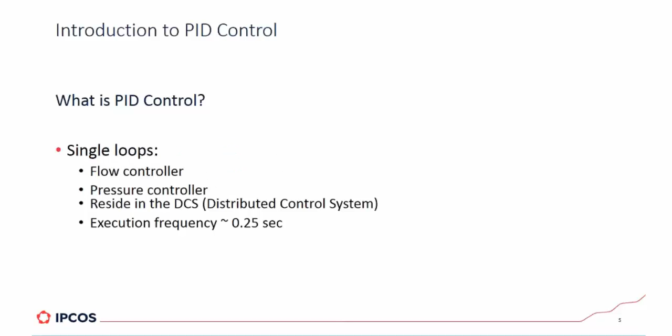So as I said, these controllers are single input, single output, so single loops are usually the type of control problems that are tackled by a PID controller, and those controllers are very good at that, provided that they are tuned properly.

So as I said, sometimes there are also more complicated structures in your DCS system, like cascade controls or ratio controls. Sometimes nonlinearities have to be dealt with using linearizations in combination with the PID controller. So the single loop controllers are the simplest ones, but there are more complicated ones as well.

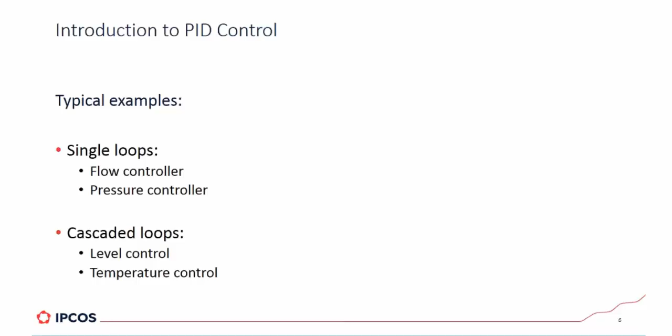The integral part is a summation of the error over time. So if there is an offset, if the error is constant, the integral keeps growing until it approaches the set point again, and then the value of the integral part will become smaller over time again.

The derivative part is related to the rate of change of the PV or the error, and that helps to anticipate changes in the future. And that's the reason the derivative part was added to the controller, so that the controller can benefit from predicting where the PV is going, because the initial slope shows you the direction the PV is moving in at the moment, and if that tendency stays the same, then it helps to already compensate for that change in slope.

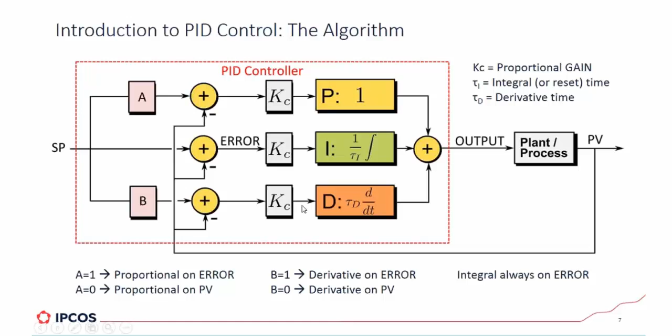So if you choose equation A in a Honeywell PID controller, that means that A and B are both 1. And that means that the proportional part and the derivative part of the PID controller work on the error. If on the other hand you would choose equation C, that would mean that A and B are both 0, and then both the proportional part and the derivative part only act on the PV, and the set point is not taken into account in those two parts. That means that if you change the set point, initially only the integral part of the controller will do something.

So it's important that you are aware of that, and it's important if you are going to tune a loop that you know what type of algorithm is used. It's also important that you think about the use of the algorithm that is active at that moment. Is it really fit for the purpose you have for that particular loop? And of course, if it does not fit the purpose, then it's better to change the equation.

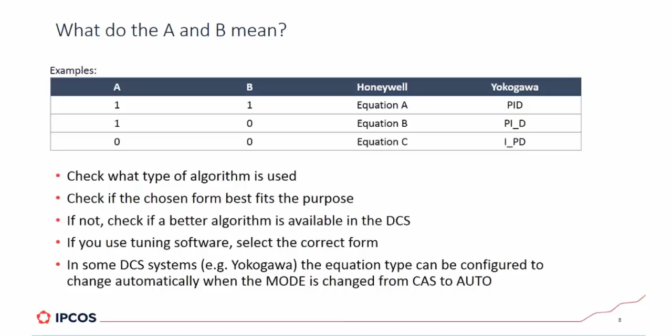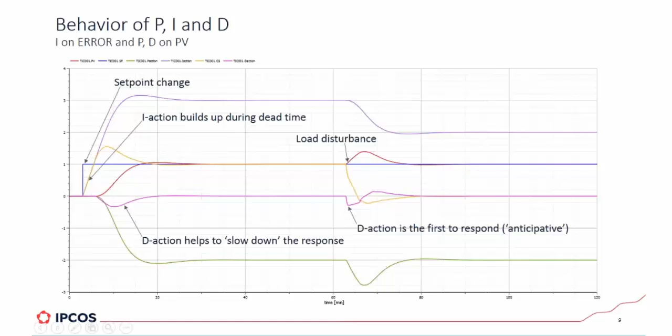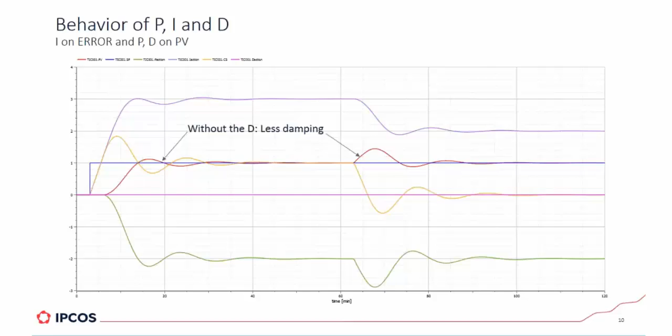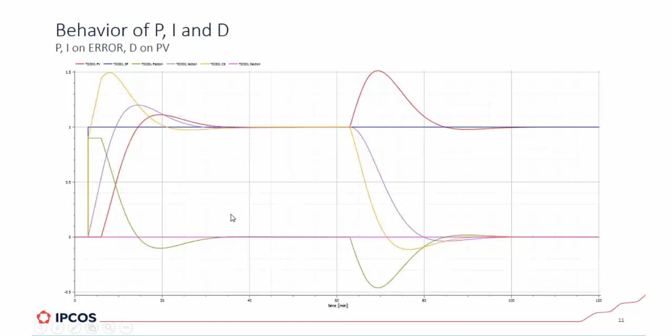At the same time, the integral also starts building up, and we see that after the delay the PV starts rising. At that moment the proportional part starts decreasing, so it starts counteracting the integral part, and we see that here the derivative part is kept 0. If we look at the response, if we include the derivative part, we see that the benefit is not that clear from the derivative part,

because in this part, in the set point change, there is already a big impact from the proportional part, which is a feed forward part, so it does not cause any oscillation. So you can already achieve the fast response for the set point change by using this equation type. So there's no real benefit to add the derivative part, because the derivative part you would typically use to make the proportional and integral part larger to get a faster response, and use the derivative to stabilize the system, to reduce the overshoot.

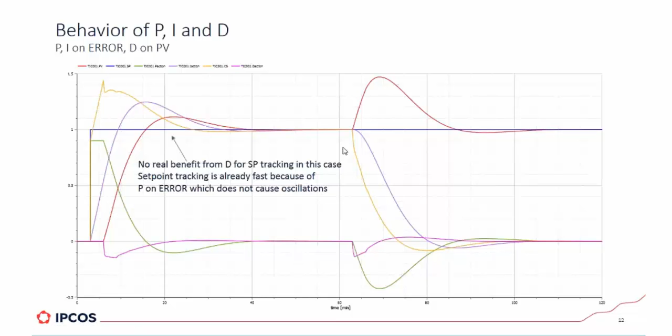But that's not necessary if you use the P on error, and that is something you would do if you want to follow set point changes. For the rejection of load disturbances, the benefits are more or less the same.

So why are people afraid of the D? Well, usually it's because the derivative part causes fast changes in the valve movements. So once people start using the derivative part, the valve movements become a bit nervous, and it starts to create a feeling of unease in the control room. Maybe it's a bit like why some people are afraid of spiders. They move so fast, and the same holds for the D in the PID controller, and that's especially the case if you have a noisy measurement.

So if you have noise in your measurement, that will be amplified by the D action, and that means that your valve starts moving a lot when you use the derivative in your controller. Another reason people are afraid might be that once they have used the derivative action and someone decides to change the set point, big changes occur in the output of the controller. So the valve makes a very big change when the set point is changed. And that has to do with the equation type that you choose.

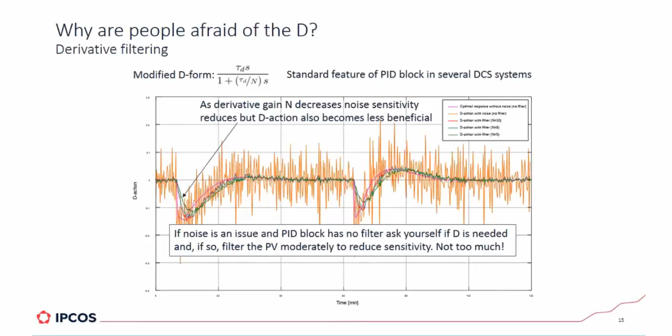And therefore you should not filter too much, because then you lose the benefit from the D action. So how do we use the D? Well, I mentioned that it helps if you use it for systems with delays.

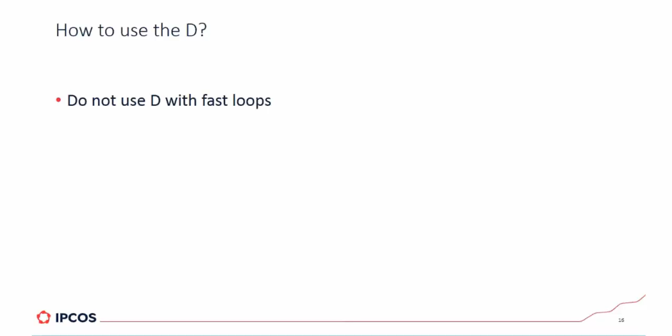So for fast loops, that fast anticipation does not really help, because for example, for a flow loop, the difference in fastness of response is simply too small to even see it on the process variables that really matter. So it doesn't really make sense to add it, and you only make the tuning job more difficult.

As I said, it's important to use the proper equation type. So don't use D on error. And also the derivative time should be significantly smaller than the integral time. As I said, the derivative part acts as a brake on the control action.

And you can imagine that if in your car you put your foot on the gas pedal and at the same time on the brake, too much, and you do it all the time, then it doesn't really help you, because you are fighting one foot with the other. And the same holds for the derivative part. If you make the derivative part too large, you lose performance again.

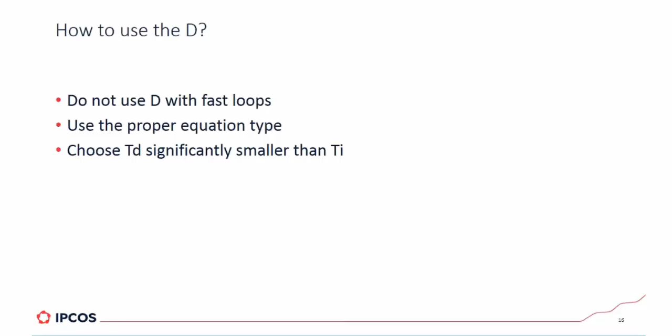So it should only be used to slow down the control action and return to the end value quicker when the PV approaches the set point quickly. And if you have a noisy signal, think about whether the D is really needed, and if it's not needed, then just leave it out of the controller. And if you think you need it, then you can apply filtering on the PV.

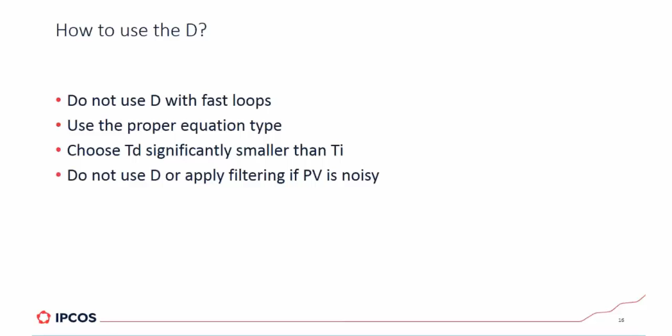So now let's look at two examples. So this is a temperature control loop that I tuned recently. It's a reformer outlet temperature. There was no temperature controller before, so the operators set the fuel gas pressure set point, and we installed a temperature controller.

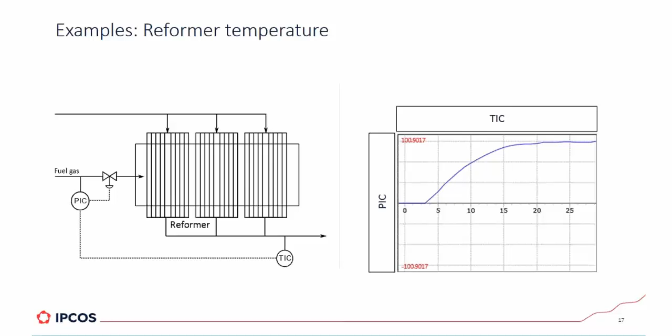So on the right side you see the model that was fit on step test data. So we did a step test for that particular loop. As you can see, there is a significant delay. So that makes it a case where the D action could help. So that's what we did. And if we optimize, in the tool that we used, we can set robustness criteria. And if we use those robustness criteria, we see that with the derivative action we can get a faster response to a load disturbance.

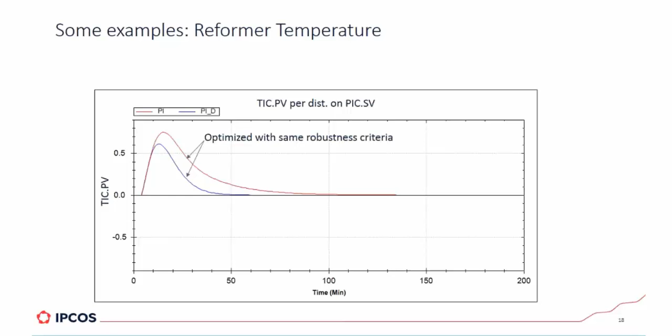Often the operators changed the plant load, and each time there was a change in plant load, they had to change the fuel gas pressure set point to compensate for those changes in the feed. And so it was important that the PID controller would anticipate those load changes more quickly. And as you can see, the derivative action helps to get a faster response and at the same time keep the same robustness. So you see the behavior of the temperature after that tuning.

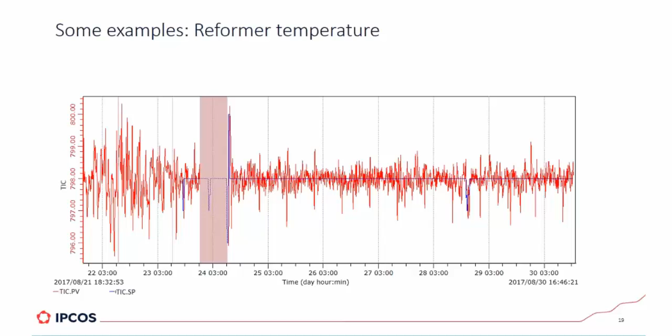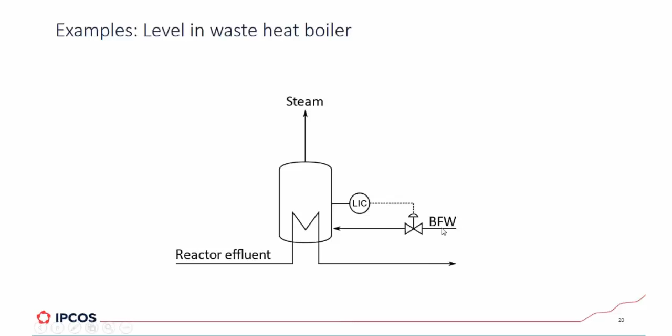So the second example is a boiler that was also recently tuned by us. Sorry, I went too fast. So the reactor effluent of a hot reactor was used to generate steam, and there was a valve of the boiler feed water directly used by a level controller, and we saw that there was an oscillation on that loop, but we also saw that it was not a normal harmonic oscillation. That's what you would expect if there is a tuning problem only.

And when we changed the integral time, made it larger, so the integral part is less important, we saw that it made it worse actually. The oscillation amplitude was the same, only the frequency became lower. And we also saw that the slope was more or less constant up to the point where it really changed direction. So that's an indication that there is stickiness involved as well.

And what we did was we made the proportional and derivative part really larger in the controller to make it more aggressive, so that the valve would already start its descent if the level reached the maximum, so that it would go quicker on the way down. So in effect you see that the output of the PID controller changes more quickly, and the valve also follows more quickly, and those changes in valve position, you don't see them in the level, because the level responds very slowly. So these are the two examples to illustrate that D can help.